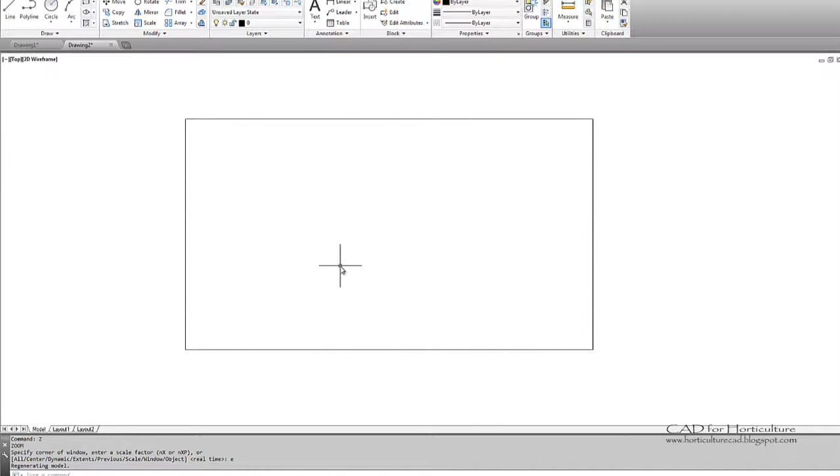And I should preface this by saying we're starting an 11 by 17 sheet that can be printed at 10 scale from model space. After we get that done, I want you to explode this. So I'm going to hit X for explode, select this line, and I'm going to offset this right side by 16 feet. So I can pull that in 16 feet. Now I want to create a little drawing information box down here. So if I offset again, we can go in, and that should be 19 feet. So I bring that up.

Now I want to trim off this side right here. And I'll also find this is a good opportunity to introduce a new command. So to get to that command, we're going to first start by doing a construction line from the midpoint here. Turn on F8. So I do the trim command. And now I have just this line going from this 19-foot offset down to the bottom.

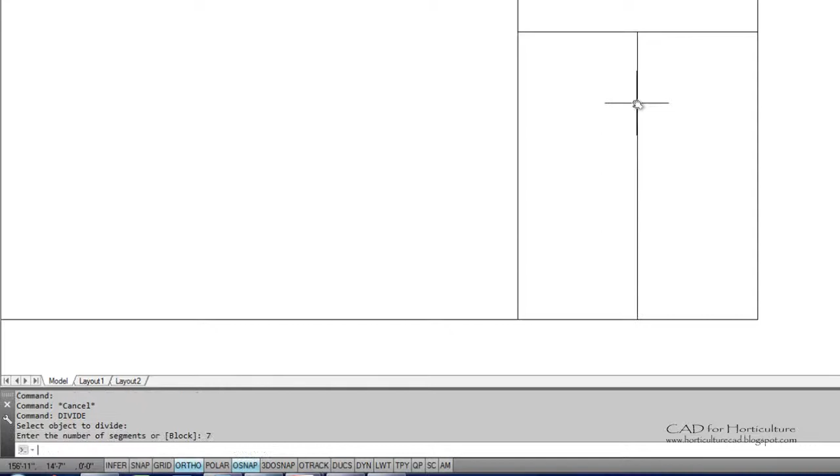And I'm actually going to use a command called divide. So I type divide into the command line. I'm going to select this line, and I want to divide it into 7 equal sections. From there, I can erase this line. And if we look very closely, you can see that we have some new little dots.

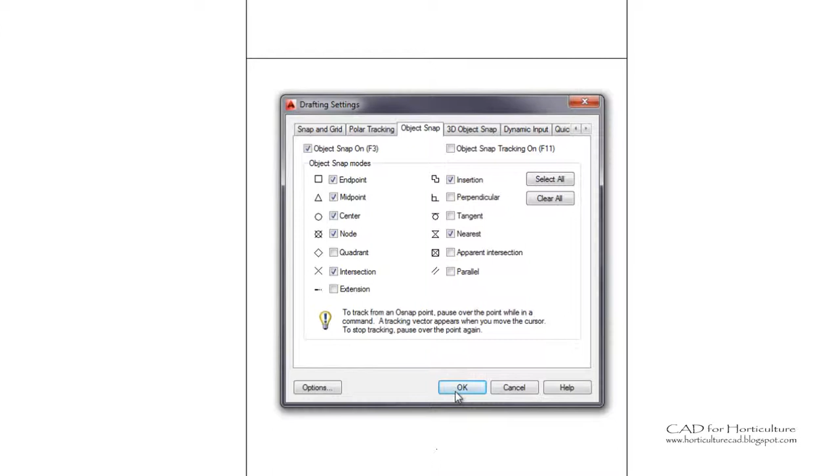And now to access those dots, we need to change a setting in OSNAP. So I'm going to go over to my OSNAP, make sure it's turned on. I'm going to right-click, use my settings so you can see what I'm doing, and I'm going to add the node. So now we have node selected as well. I'm going to say OK. When I go in and start a polyline command, it's going to grab these nodes, and I have ortho on, so I'm just going to drag some lines off to the side.

Then I'm going to use my extend command, EX, enter, and extend all those lines over. Then I'm going to trim this out. And so I have these boxes kind of separated over here.

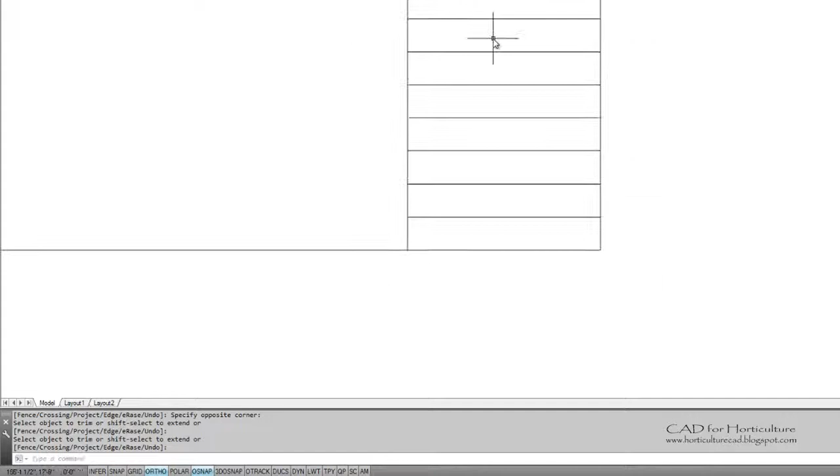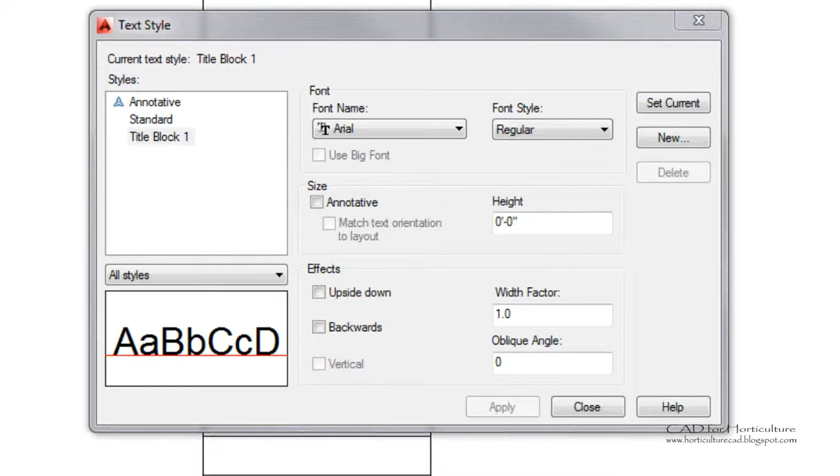So let's set up some text. I'm going to go to the Annotate tab. I'm going to click on this bottom area to get this dialog box, and I'm going to say New. We're going to go Title Block 1, and I'm going to say OK. And I want this to be 3.5 feet in height. And I can go ahead and hit Apply, and I'm going to create one more. Title Block 2. OK. And this one, I want to be 1.5 feet in height. And then I'm going to close. So now we have our text style set up.

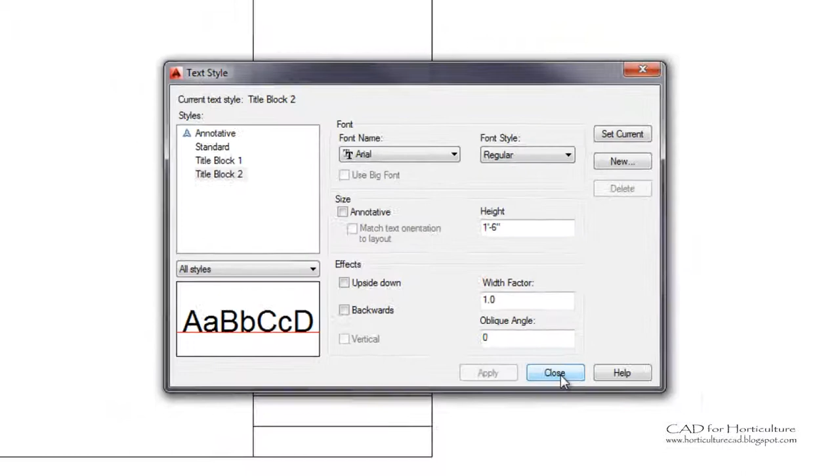I'm going to go in and use single line text. And I'm going to pick a point just a little bit past the midpoint. And if you read your command line, this is a great time to enter a rotation text angle. So I'm actually going to put 90 degrees. It's going to look like it's going horizontally, but then it's going to go vertically once you press enter. I'm going to put client information. And hit return, say address, and city, state. Then when I hit return, there it is. It's all going to fill out nicely, and I can change the spacing a little bit.

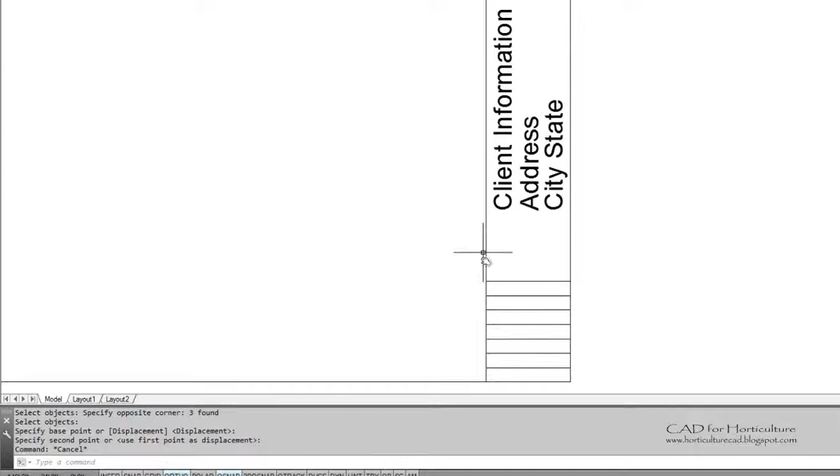So we have that. I'm going to pull this over just a little bit farther so I have some more room up here. I'm going to change this now to the text style of Title Block 2. I'm going to come into this area. And here we want to add your initials, or whoever's drafting initials. And remember, we're at a rotation angle of 90 from the last time. So we want to change that back to 0. And I'm going to enter my initials.

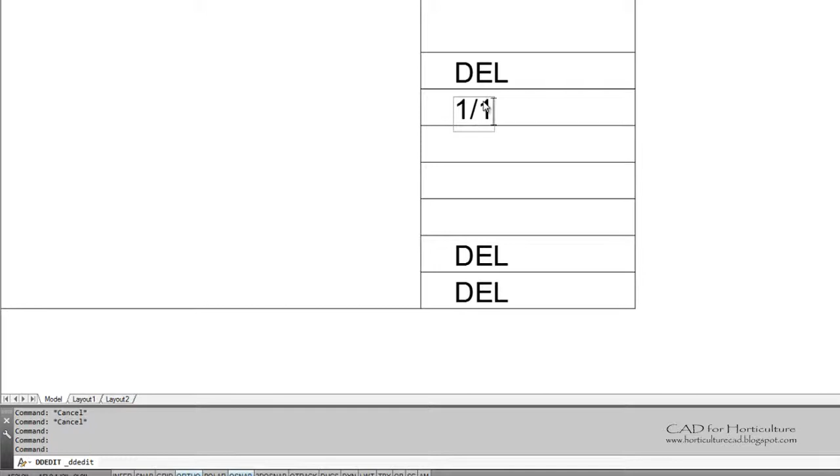Then I'm going to use the copy command a bunch here. I'm going to use the copy command, and if I copy this down to here, I'm going to skip a couple spots. I'm going to use this one and this one. That's a really quick way to get everything nicely spaced. The middle one, I'm going to put the date. So today is about 1/28/14. Enter. Or just click once on that one, and then I'm going to enter a scale.

So this is where your written scale is. 1 inch equals 10 feet. And then page 1 of 1. So we have that information there. The last thing I want to do is grab this, pull this up to here, and then I'm going to put my actual name, copy it down one more time. So now we have a title block set up and our page limits. So that is the information for today.